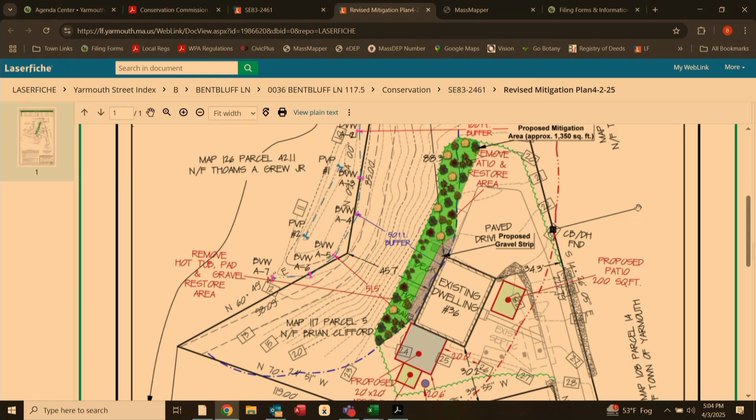There is also a hot tub dry well proposed so that any discharge of water from the hot tub would go into the proposed dry well. There wouldn't be any discharge down the slope to add to the wetland system. With that, I'll bring it back to the commission.

Okay, thanks, Brad. Questions from the commission? Hey, Brittany, are you all set? Yeah, I appreciate your attention to detail on this one. Thank you. Thank you.

Anybody in the audience have any comments or questions on this one? Is there anybody on Zoom? Question, yes, sorry. Oh wait, Ellie, I'm sorry, you can't— you can now ask because you weren't part of the quorum. Sorry about that, I should have mentioned that before. Oh, okay, I thought only if she's in support she can speak, if she's against it she can't. I'm sorry, on the commission only. Kidding, that's a joke. Did anybody on Zoom? No.

Unless there's any further discussion among the board, would somebody like to make a motion to approve the project with special conditions? So moved. Second? Second. All those in favor? Aye. Opposed? Carries unanimously. Thank you very much. Okay, thanks, Brad. Thank you.

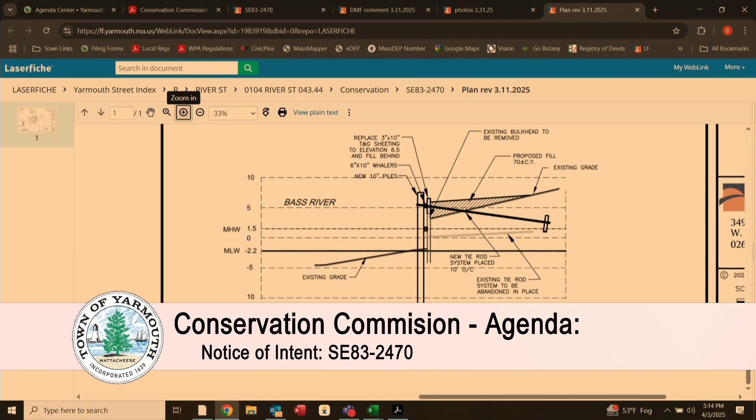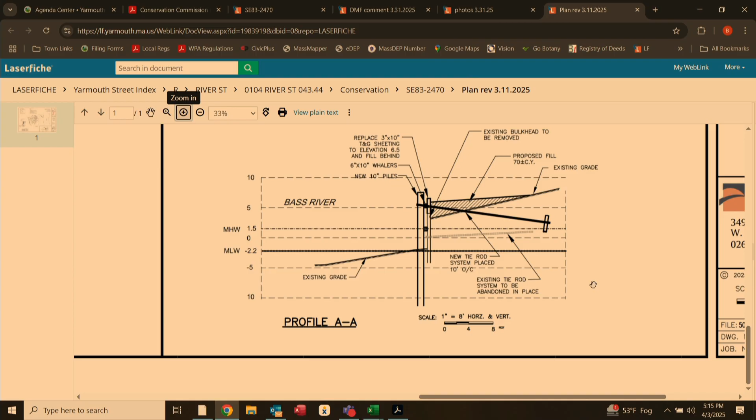So as a result, any barge would bottom out on the sand in front of the wall. If you worked 2 hours on either side of high tide, would a barge be able to not ground? Theoretically yes, but you're reducing the amount of time somebody can do the job. Do we routinely put that stipulation in to prevent barges from doing it? We do that all the time with docks, right? I just haven't had one where a barge was restricted or required in front of this board, so I'm not aware of what you normally do.

I'd like some, I don't know, I'd hope that you might be able to reconsider that, but if you can't and you insist on going through with the dead men, then I'd like to see some trees getting put back into the landscape rather than just doing shrubs. To remove 7 trees and replace with 21 shrubs, I don't know that I would consider that an even trade.

I think the most important part is that you're proposing to excavate at least how far from the wall? This is like 15 feet, and you said the length of the dead men has to be excavated, and they're 15 to 20 feet. Yes, that's part of the no disturb zone.

So if there is an option to use the helicals where we don't have to disturb the no disturb zone except for the fill for the edge of the wall that we're raising, that would be preferred. I can see that point, but...

The only thing I'll say is that we can't replace the wooden wall without excavating all of it. We will have to excavate and remove all of that with machinery from the upland. We would not replace that wall from a barge. You just couldn't carry in all that equipment on a barge when you've got the upland right there and the bank is stable. So it all has to be removed by hand and by machine. There's just no way around that.

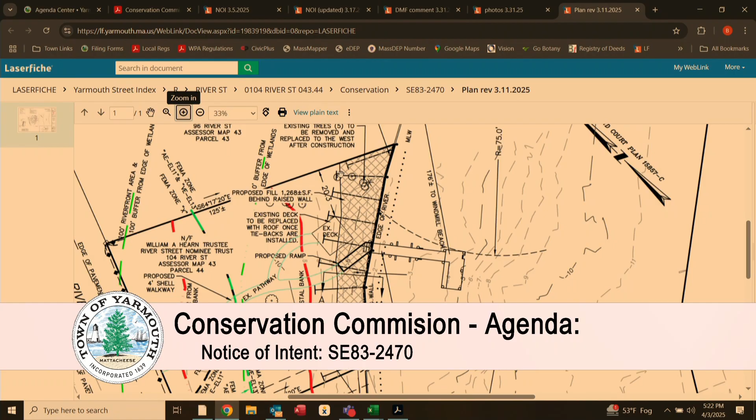Okay, anybody else? Brittany, anything else? Yeah, the only other thing I had is that I really want to see the helical anchors. But other than that, if we're excavating all of the area up to the end of the dead men, that whole area should be replanted, not just the 13 feet minus 3 plus for the gravel, so we don't have any bare area. It should all be covered, even if you're going to just do ground covers.

We're perfectly fine with putting ground cover for that area. Yeah, so I just want to see the whole area that's being excavated, which is ideally going out to the end of these dead men, right? Yep, to be planted with something. Yeah, we don't have a problem putting ground cover to cover all of the dead man area. This is not by any means meant to be a lawn in any fashion.

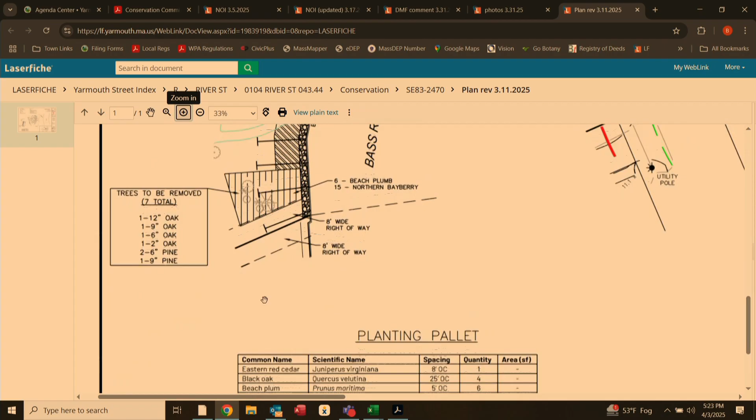Do you need to see a revised plan for that? I'd like to, yes. Are you okay with approving it on its own with the revised plan, or do you want us to take a look at it again? If the only thing we're changing is the number of trees and ground covers, I'm fine with approving that. And also the pathway, and no roof. No roof - take out the shell, and we've got to take out the roof.

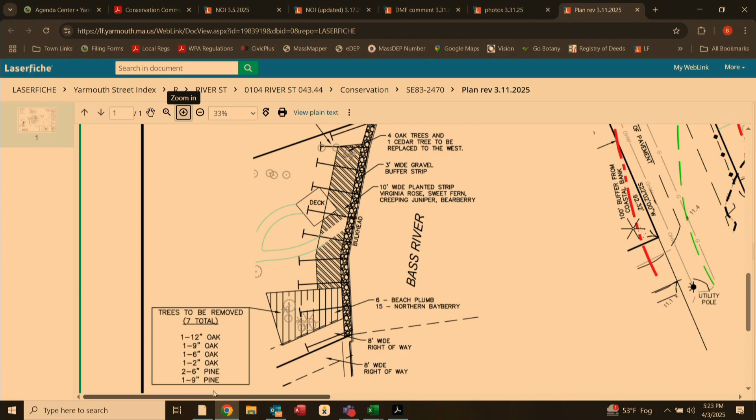I'm not an engineer, and I understand there are just two options that engineers and contractors prefer to use. I just don't see the big downsides of the helicals for why you don't want to use them. They're cheaper to purchase, okay, but they're more expensive to install because you have to use a barge. So it's a wash - I don't know the numbers, I really don't.

Would it be possible just to - I mean, you're basically taking the trees out on both ends because of the dead men that you're putting in there - would it be possible to just perhaps use the helicals for those, where then you wouldn't - oh, then you're still - never mind, you're still - sorry about that.

Now, the site is pretty forested, so there were quite an amount of trees on the site. I realize we're taking out trees, but when you go back, you know, if the commission is really concerned about the trees being removed and only replaced with shrubs, we can replace some of those trees somewhere else so they're not on the dead men and still have the same amount of trees left when we finish the project as there is today.

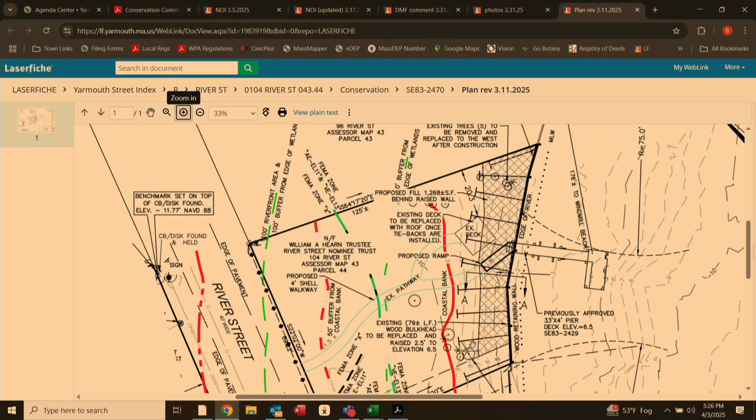It seems like overkill, and I'm concerned that in plan view, where you have the hatched area, it's going to be a mess. You're going to excavate what you need to get those in, with 20-foot rods, but your plan view of the impact doesn't really reflect that, so consequently you're disturbing a lot of land that would be unnecessary if you did an alternate tieback system.

It just seems like overkill, and I'm leaning a little bit towards my engineering background, but why would you have to do such overkill when the adjacent properties are addressing the same issue and withstanding the risk?

Well, if I could—and the other thing, if you're going to do this, show accurately in plan view the impact area, because you do have trees. I think the trees will come down with the excavation of the dead man, it's going to be an excavation and then get the dead man in it. I just don't think the plan view, the hatched area, reflects what will be impacted by this.

Well, the hatched area is what we had proposed for mitigation, not so much the impact area. So now that we've agreed to put in a ground cover over all of the dead men, when I submit a plan to Brittany, I can include additional plantings along the back side of those dead men.

When we put in the dead men, they dig out a trench for the post that goes parallel to the water, set that down deep, and then just excavate a trench to the water. So they don't dig up the entire 100 feet and strip it all down—one parallel to the water, then one perpendicular. So not every inch of this entire site is going to be excavated in this area. And then you have the trees, yeah.

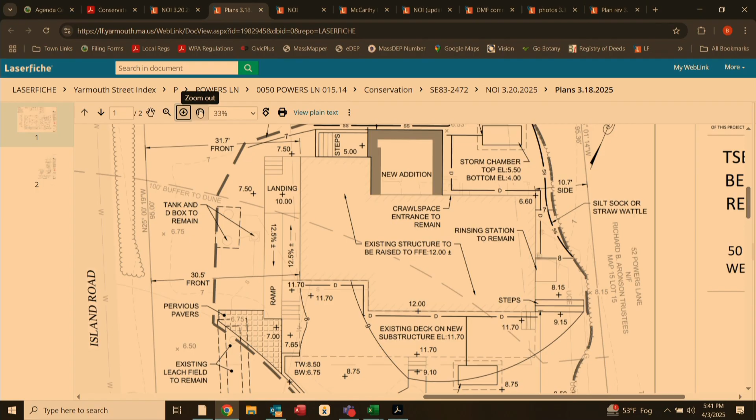Next will be raising of the grade around the front yard area and installation of a small retaining wall on 2 sides of the property. And finally, proposing an access ramp on the west side of the building.

And with that, pervious pavers that help the transition between the driveway and the ramp and stairs, and also don't necessitate any covering up the existing leach field. The existing septic system will remain.

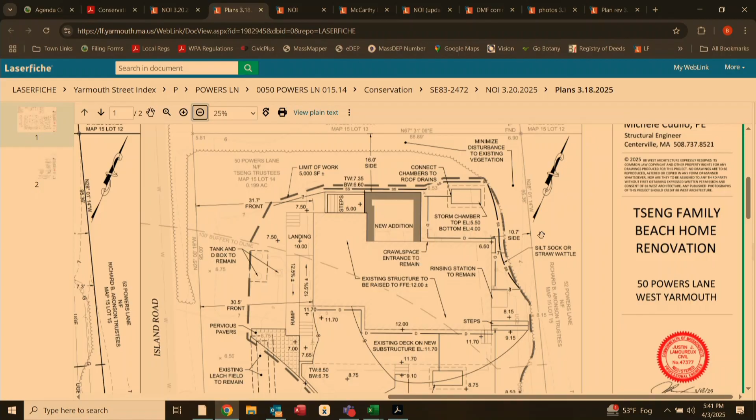The 0 to 50 buffer to the dune has no work being proposed inside of it. Approximately 5,000 square feet of work is being proposed in the 50 to 100 foot buffer. 2 storm chambers are being proposed to take roof runoff from the building.

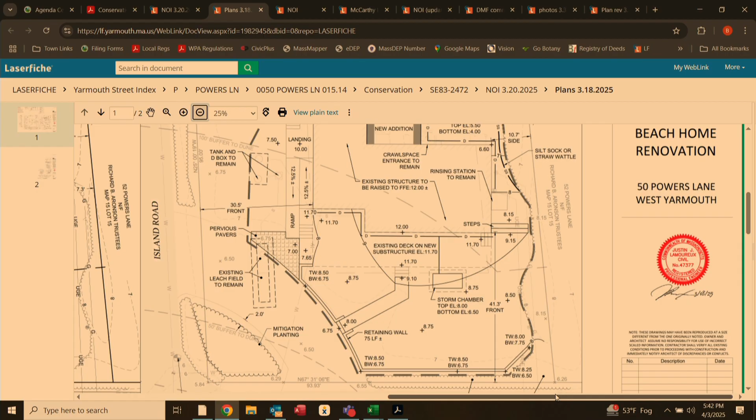There is some vegetation noted on the existing plan, sort of all around the north and east side of the property, and on the north side of Powers Lane along the southern property line. At the corner of the 2 roads there's a little beach grass called out. We don't intend on disturbing any of the vegetation, but if any is disturbed, it will be replicated. Regardless of whether it's disturbed or not, we are proposing mitigation planting in that little island there.

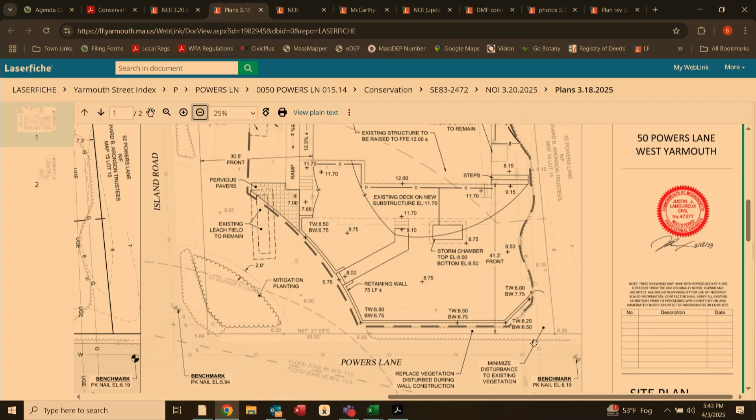I think that pretty much covers it. Oh, the entire area is in flood zone AE, base flood elevation 11. Land subject to coastal storm flowage. I think that's it, and I'll turn it over to the board if you have questions.

Okay, thank you. Questions from the board? Nobody? I'll ask you a question. Did you outline somewhere, that I may have missed, what plants you're planning to plant with the mitigation?

It's not included on the plan. We didn't provide a detailed planting plan. It is beach grass, and that's just what we proposed offhand, but whatever you'd like we can add to the plan if you require. We will just need some sort of detail about the plantings, the specific species. Okay.

I just have a technical question maybe you can help with, because on the property information it says the soil is designated as the Hooksan-Dune Land Complex, which is sand dune. And then the sentence above that says the site is located within 100 feet of a coastal dune. So I'm a little confused, and I didn't get to the site, I wasn't able to access it. Are we in dunes? The soil designation is sand dunes.

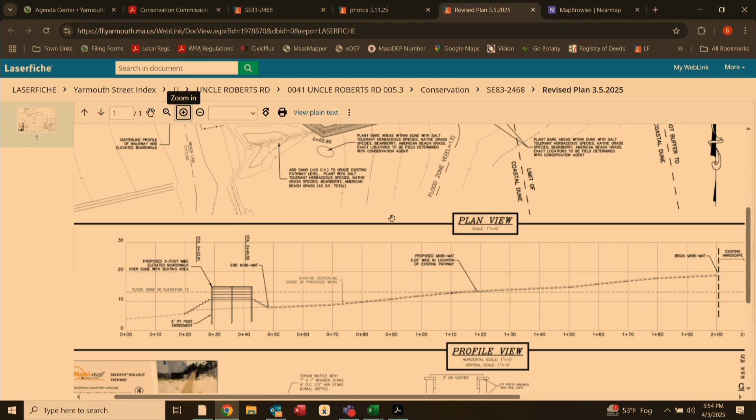There's an existing notice of intent and order of conditions out from when he built the house. He rebuilt a new house and the patio in the backyard, and I think we may be talking about that a little later in your hearing in terms of a partial certificate of compliance.

With this project, DEP has issued a file number with no comments, file number 83-2468. We did file with Natural Heritage, and that file number is 25-19314. Natural Heritage issued a letter on March 18th, 2025, basically giving approval for the project, with a list of conditions regarding construction, where we want to work in the dune, and the time of year. In their letter, the protected species they mentioned is piping plover, so no big surprise there.

We can certainly do this project and work around the constraints with the endangered species. Happy to answer any questions, and either I can answer them or the project engineer can. Paul, questions from the board?

I just want to acknowledge your use of the helical soil anchors, and I appreciate that. The purpose of those is primarily to prevent any flotation, since this is down right along the shoreline, sort of a belt and suspenders kind of approach. They have a 3-ton pull-out cap, so they're pretty sturdy.

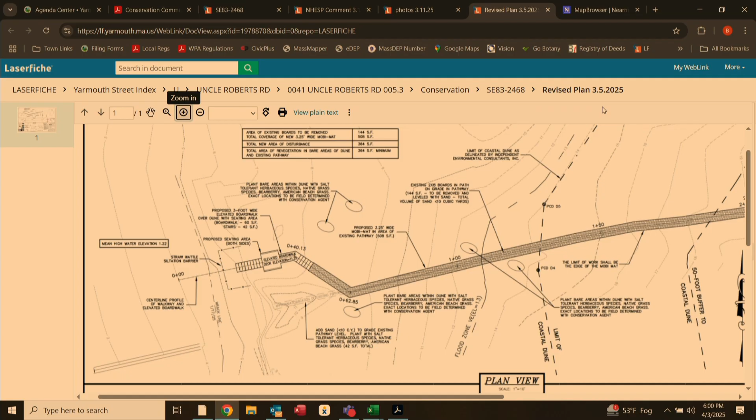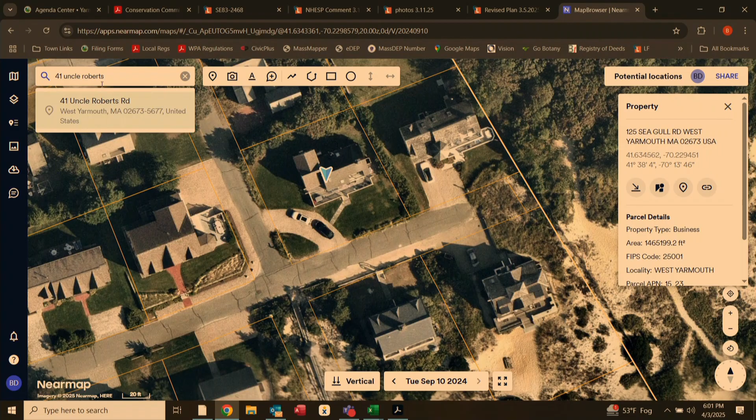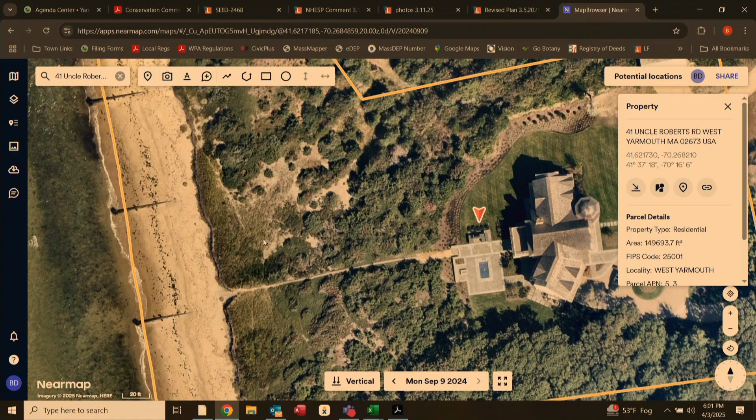If I recall, being out in the field, if the ocean's at my back and we're coming up to the right, there's an old pathway that sort of went off like a little spur, and there's area there to plant. So we have plenty of places to plant to do extra mitigation work, if that's what the commission wants. The dominant species out there in the dune is American beach grass, which is fairly easy to put in with plugs. All the jobs I've done with American beach grass, I've never seen it not take, as long as it's got the right sandy conditions, and that's what we have here.

So we will do whatever mitigation the commission needs. We don't have a value on that, but the only other thing I'd recommend, when putting the Mobi-mat, is there a need to level off the surface? When you remove these wooden planks, do you expect there to be huge divots that need to be regraded? Otherwise, if you put the Mobi-mat over the bearberry as it is right now, it's going to be there the whole season, but you wouldn't be excavating it. Are you proposing to remove everything within the 3.25 feet wide, or just placing the Mobi-mat right on the beach?

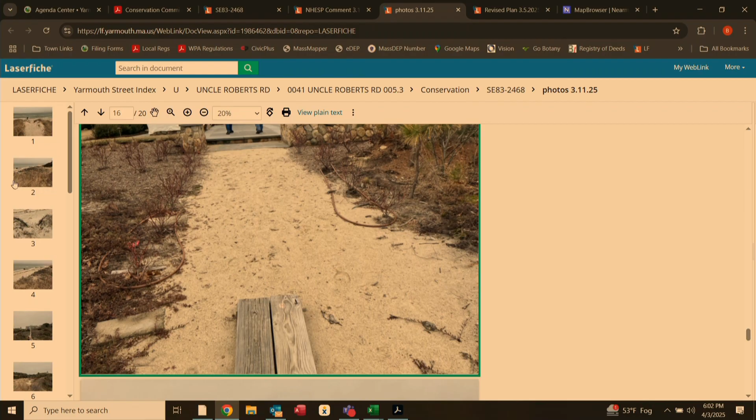Just another, are you all set, Brittany? Yeah, I just have one about the Moby mat. It's going to be taken up in the off-season, I think you said. So would that be in October, and then put down around June? Yeah, I mentioned in the application that we'd be putting the Moby mat back in around June 1st or whatever, and leaving it in place until maybe towards the end of October, then taking it out. So it'll be out for the winter storm season, and it's very simple, we just roll it back out again.

Speaking of winter storms, I'd hope water doesn't come up that high, but is it secured well enough so it doesn't become a floating piece of debris? It's in sections, right? It can be in varying length sections, but it's pinned with 18-inch basically staples, more or less, to prevent any flotation. It gets put down, stretched, and anchored into the ground. So it's fixed, not just at the beginning and the end, but all along the side too.

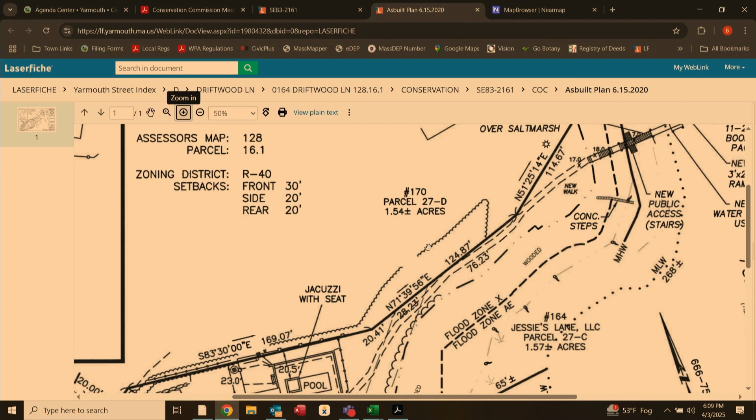So the trench drain would be right on the lawn side of the planting bed? Correct, right where the interface between the lawn and the planting bed is. With infiltration under the lawn? Well, with a trench drain, you're not creating a large structure, you're creating kind of a stone box that runs parallel for a little bit. But there are two specific areas, just the way the dips are out there, the way the ground is. So we're not planning to run it the entire length, just in the areas where the lawn is naturally low right now.

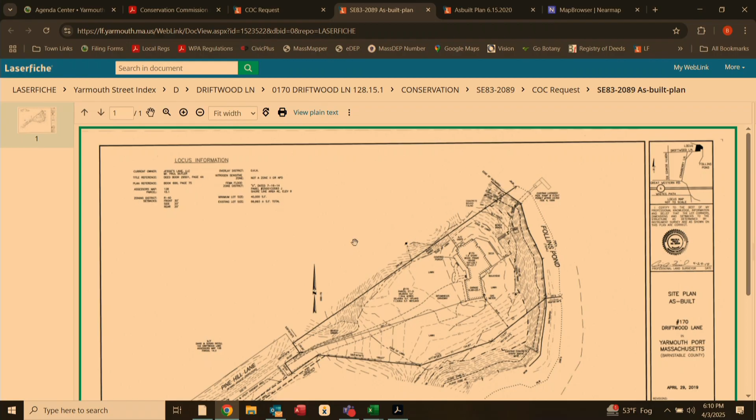Okay, any questions? Did you want to do anything first, Brittany? No, that sounds good, very good. Anybody from the board have any questions? No questions.

So everybody agreed? You think that's a good move, a good way forward? We'll do that and come back for the sign off on the COC once you've done your inspection. How long, when do they want to put that in? I would say immediately, if not sooner, is their plan.

So once we get our permission tonight, it'll be very quick. Okay, and do you need any guarantee? Do you want to see? Do you want to give it a growing season first, or are you thinking you want to continue to the fall or end?

I think it's with this, I think it's always wise to at least get a growing season in before we sign off on something. If I could, Mr. Chairman, the only growing out there are the wildflowers, so we're not planting any shrubs or bushes or anything like that. So the wildflowers will take. Yeah, but I've never known them not to take.

Right, but we're addressing erosion. I mean, isn't that the whole point behind planting the wildflowers, to address the erosion? But until we know the wildflowers are established, right? I'm hoping that the stone, our plan, is that the stone is going to address the erosion. The wildflowers are just to cover the ground that we're going to expose when we remove the mulch.